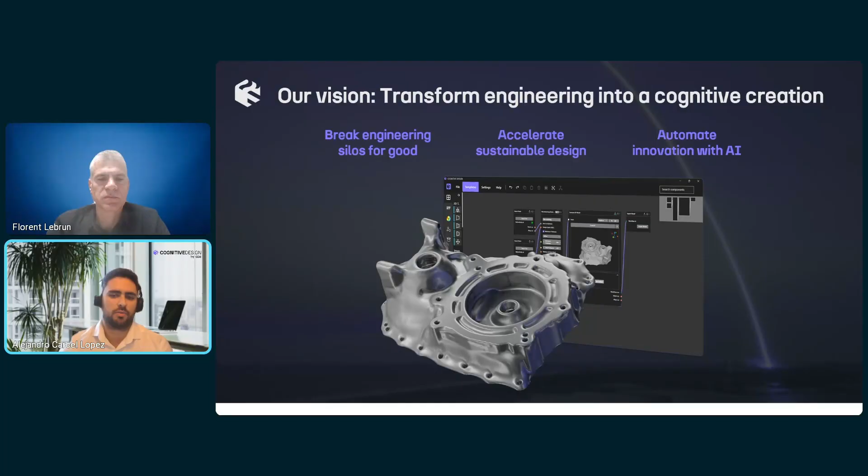Sustainability is an important topic for us as well. That's why we want to help accelerate sustainable design and have sustainability metrics in the design process. And we incorporate AI where it makes sense to accelerate the design process and the design decision-making process. So lots of automations in our software are powered with AI with the right purpose.

To give you better insight into our technology, one differentiating factor is we master implicit modeling. In our software, all of the modifications are done with this geometry kernel, which is different from traditional kernels like B-rep. We describe the geometry with implicit functions, which is a way to modify the geometry based on data in a very robust way without breaking it. This also allows us to work with highly complex, highly organic geometry without running into issues when doing iterations or automations.

We use AI-driven analytics to help engineers make the best decisions in their design process. For example, if you're trying different lightweighting methods for performance, if you're analyzing the implications in cost and manufacturability of your design decisions, the materials that you choose, depending on your business case, the cadence of production, or other data based on your context, your location, for example.

You can analyze all of that, and with AI, we can accelerate finding the right combination of parameters to find the part that corresponds best to the objectives you're looking for. It may be reducing cost, increasing performance, reducing weight, increasing manufacturability, etc.

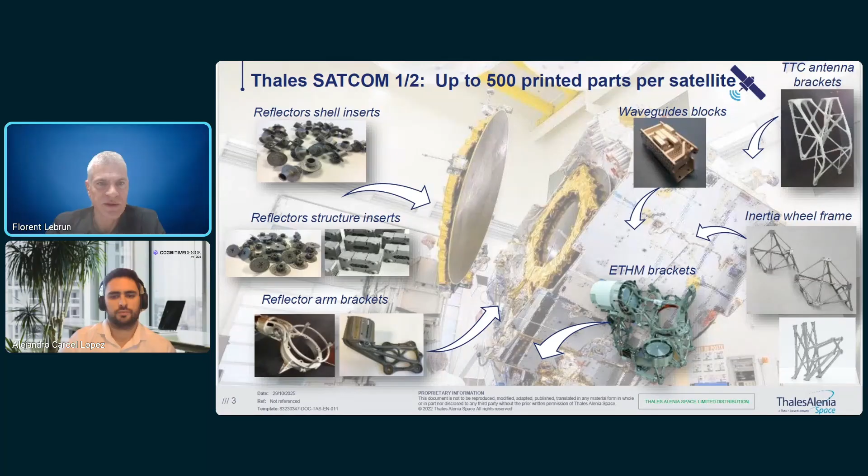With the next slide, I'm converging on the topic we will discuss today. For the satellites that TAS designs, manufactures, and tests, we use additive manufacturing to produce a growing number of technical parts. And these components, mainly printed in titanium and aluminum using powder bed technology, include structural parts as illustrated on this picture and RF components on the next slide. And sometimes we combine both functions.

The main reason for using additive manufacturing for this kind of component is obviously the mass saving and the improvement of the technical performance of the parts, or to reach a new range of performance offered by new design opportunities. And ideally, to obtain this without any additional cost in the design phase.

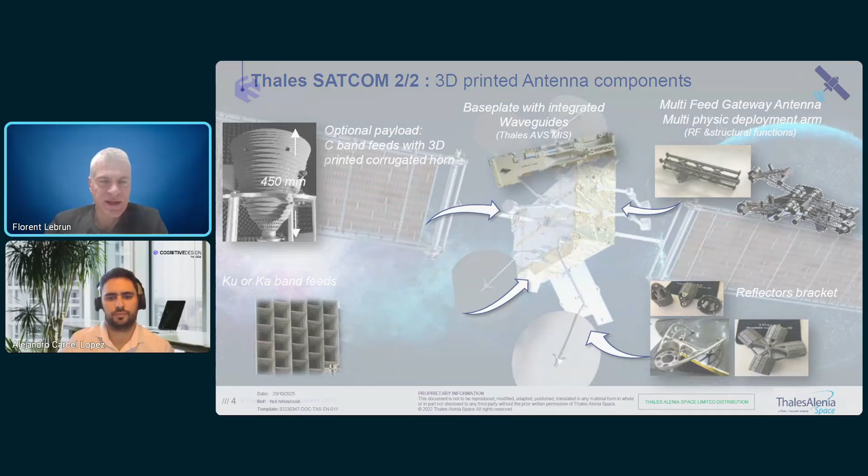On the next slide, I will introduce the study case we will discuss today. So the design activity of these 3D printed parts remains a critical step for us and for everybody, I imagine, with respect to technical performance, printability, and part cost. So we are therefore working to adapt our design tools to optimize this critical design phase. The main goal is to optimize the ratio of design cost versus final technical performance.

A few months ago, we were interested in the tools proposed by CDS, and so we proposed to CDS to work on the study case illustrated on this slide. So we are talking about little tripods, little fittings like this one, I hope you can see it, in titanium. It's not a complicated part. It's based on a design that is not really optimized for 3D printing nor in terms of mass and stiffness ratio. In fact, it's a legacy design we have never challenged. It does the job, but there is potential to optimize it in terms of mass, stiffness, and also printability.

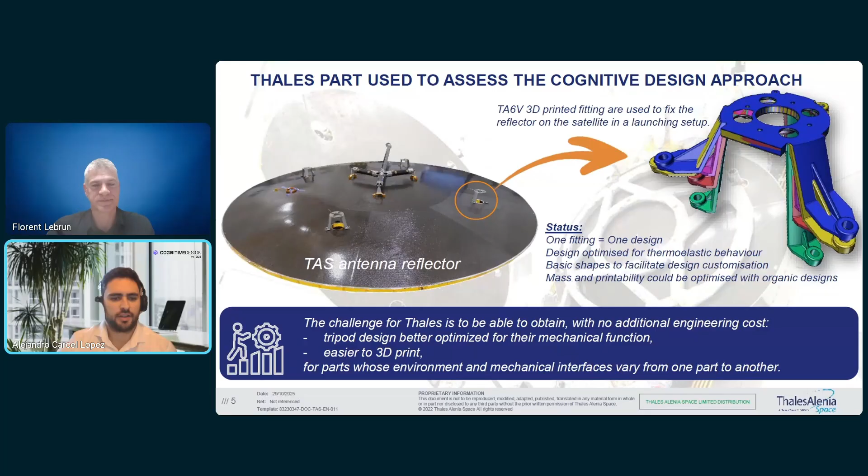Thank you, Florent. Very clear presentation of the use case. And just to kind of summarize it on our side, right? So the estimation is that there's about 80 variants needed per year. And as Florent mentioned, there's going to be quite some time going into each variant, and that leaves little time for innovation or optimization of each one of the variants.

The current design methodology for the tripod family, basically every time we have a new part, we have requirements, we have to do the CAD, we have to do the simulation, the manufacturability, the business feasibility for each one of the different components. And then every time we change the design based on the new requirements, we need to start all over again. So just by the length of this process, this means that we never have the chance to really innovate or make an optimization.

So this is where we came in with the objective of building one reusable workflow that allows Thales Alenia Space engineers to make decisions for each part on what is the best technology. It could be additive manufacturing, or perhaps even considering CNC machining in a more optimized manner could make sense. Aluminium versus titanium. Maybe titanium is not always necessary, and aluminium can be more interesting. So this cost, performance, and manufacturing trade-off is something that we're looking to tackle.

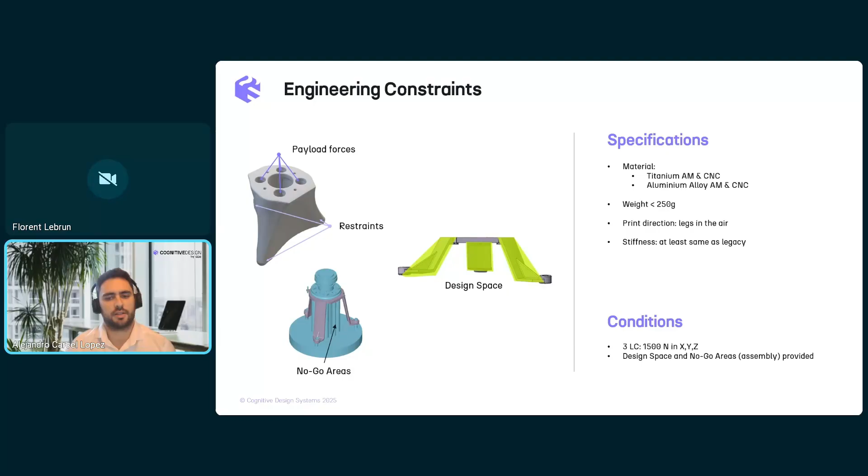Okay, so now that we understand the use case brought to CDS by Thales Alenia Space, we're going to dive a bit deeper into the cognitive design approach. So as we just saw, today is a linear process for every part, where every time we start from the requirements and we end up with the final part. And the estimation is that every time we do this exercise with a legacy workflow, this takes about 2 weeks. So 2 weeks every single time, and we end up with a part that is not fully optimized.

The way we rethought this workflow with cognitive design is we're going to build one single reusable workflow that can be used for each set of requirements. Every time we'll have the option to do a full-on design exploration for each one of these sets of requirements, and then design fine-tuning based on simulation, based on manufacturing data, cost data. And then we will be able to export the geometry for validation. So this allows us to reduce the process time for every part.

Part number one, you can see that it takes also 2 weeks, is the time to set up the engineering workflow, the design exploration process, and make sure that all the sophistication we need in the workflow is included in there, and that everything is working correctly. But then once we have this reusable workflow, every other part will only be a couple of days that we will need to take it from the requirements until the validation.

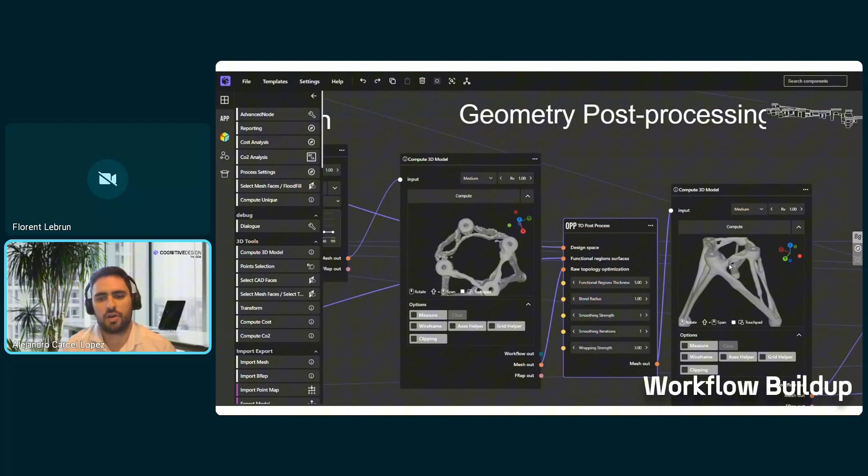Level set allows for automated smoothing, but sometimes for very fine topology optimizations, we might not use smoothing. And in those cases, we can automatically reconstruct the topology optimization by joining it with the functional regions and by smoothing all of the raw areas of the topology optimization result, and also making sure that all of it stays connected together.

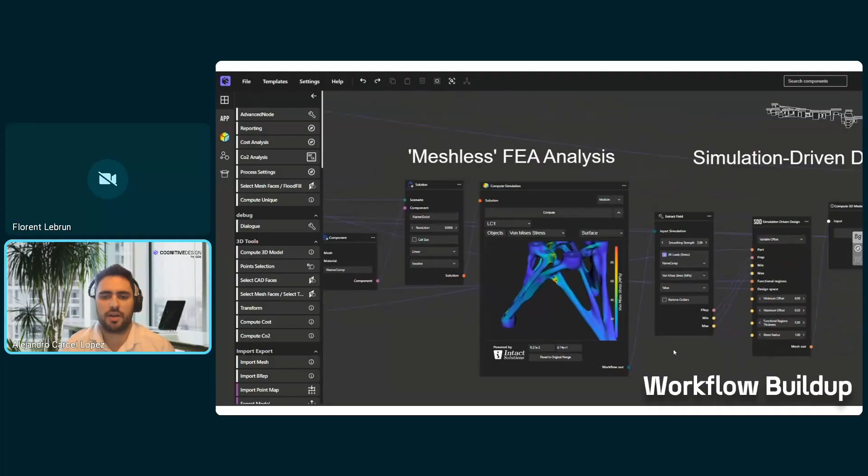Then we can quickly run a meshless FEA analysis. So we don't need to be creating a tetrahedral mesh every time. It's a fully automated process where every time we can get a performance metric on the design. So here we can see for the three different load cases, what are the stress areas and what are the stress values. So the next step is going to refine the topology optimization based on this data.

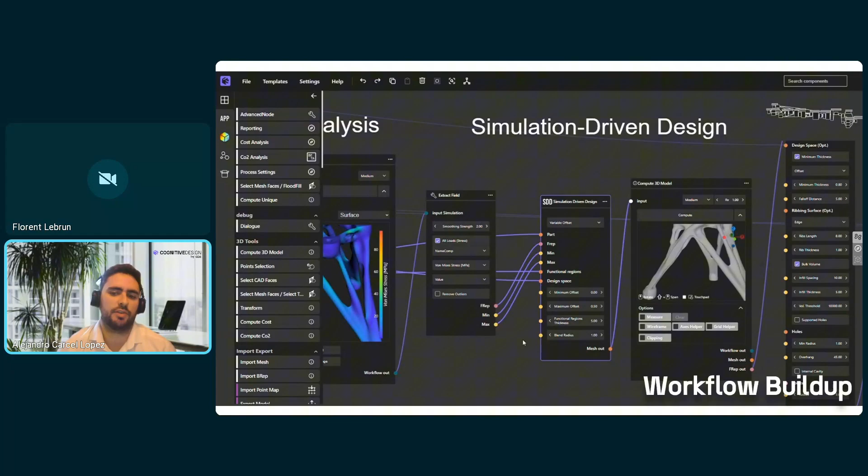We're going to use simulation-driven design. We have different options for simulation-driven design. In this case, we're interested in increasing wall thickness in the high stress areas to reduce stress levels, but by adding very little weight to the topology optimization. You can see here how that area with higher stress was solidified and thickened further.

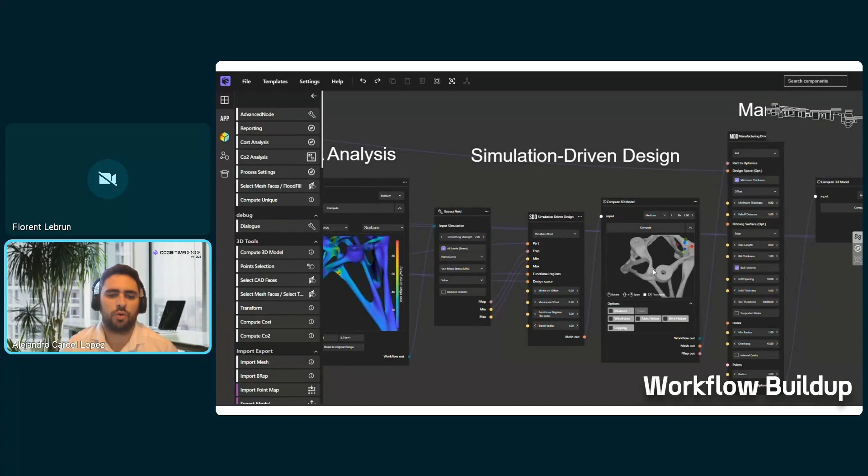And then we will take our geometry to the manufacturing-driven design. In this specific case, we guarantee that the minimum thickness for the process is met, 0.8 millimeters. And also we're making sure that we have no issues with bulk volume, so that we don't have thermal concentration.

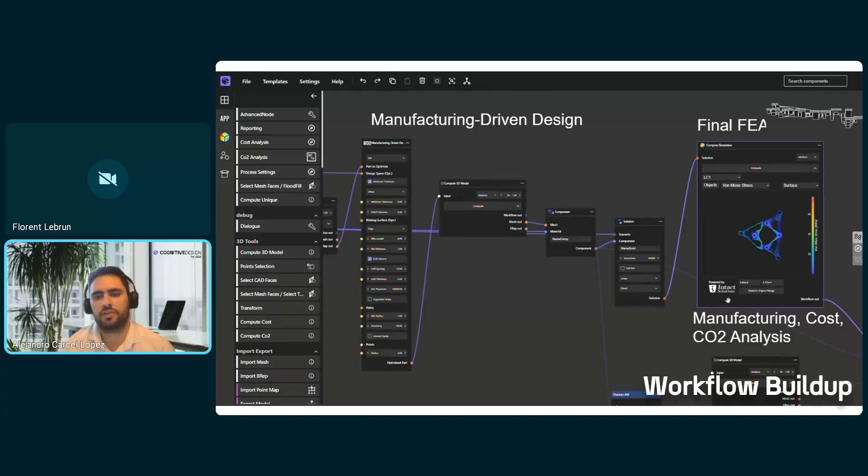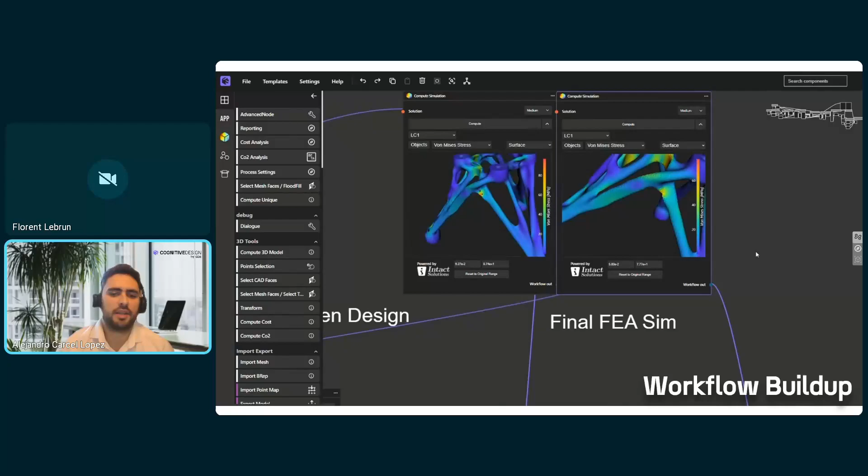So once our part has been optimized with a generative design method like topology optimization, with simulation-driven design, with manufacturing-driven design, and our geometry is clean and smooth and integrated with everything, we do the final FEA analysis. So in this specific case, when we compare before simulation-driven design and after simulation-driven design, we see that our maximum stress value has gone from 97.4 megapascal to 76 megapascal.

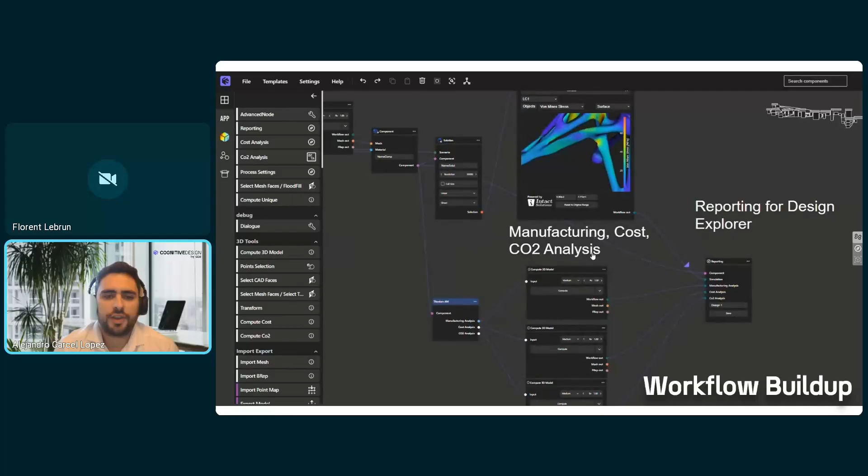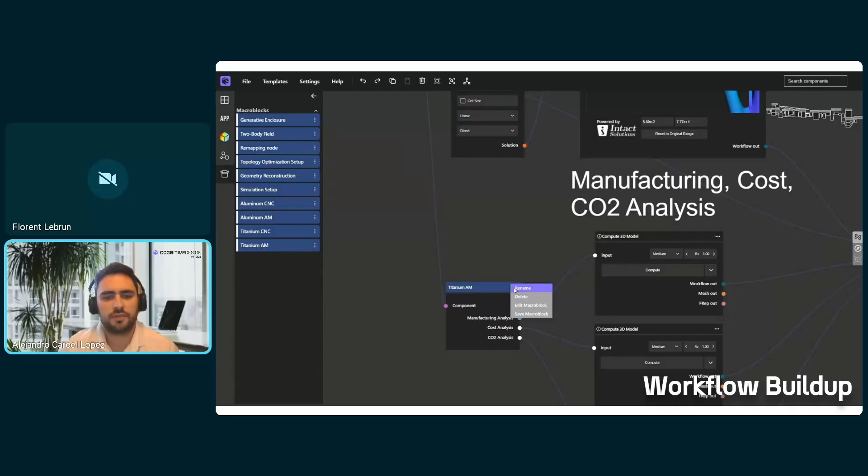So now we can look at other things like the manufacturability, the cost, and the CO2 emissions. So we have different macro blocks that we can create and store in our library to reuse each time. You see that we have aluminum CNC, aluminum additive manufacturing, titanium, also for both of them. So each one of these blocks has fully customizable parameters when it comes to the manufacturing analysis, to the cost

analysis, the CO2 analysis. So for manufacturing analysis, we can adjust the minimum thickness in the process, the overhang angle, the volume threshold, and also things like slice area variation. And it will also analyze other issues such as internal cavities.

For the cost, we will have access to what manufacturing technology, quantity of parts, hourly rate of the machine, machine cost, and recurring and non-recurring costs. For the CO2 analysis, you will have access to machine power consumption, material-specific energy emissions. So you can fine-tune all of your parameters.

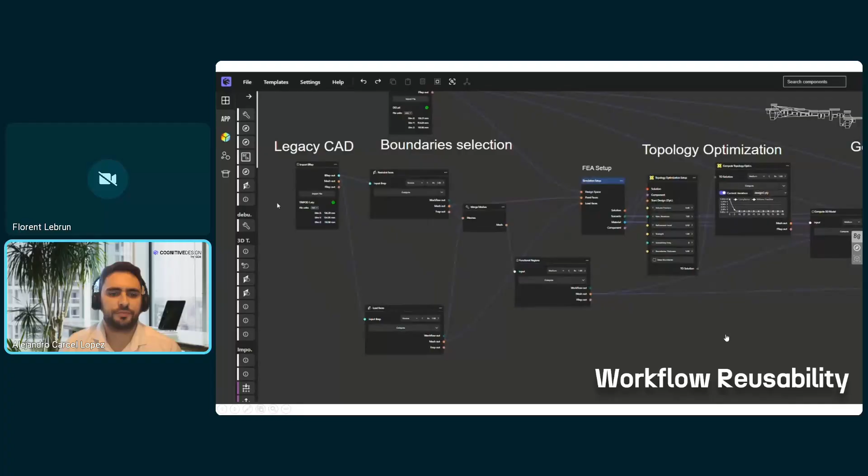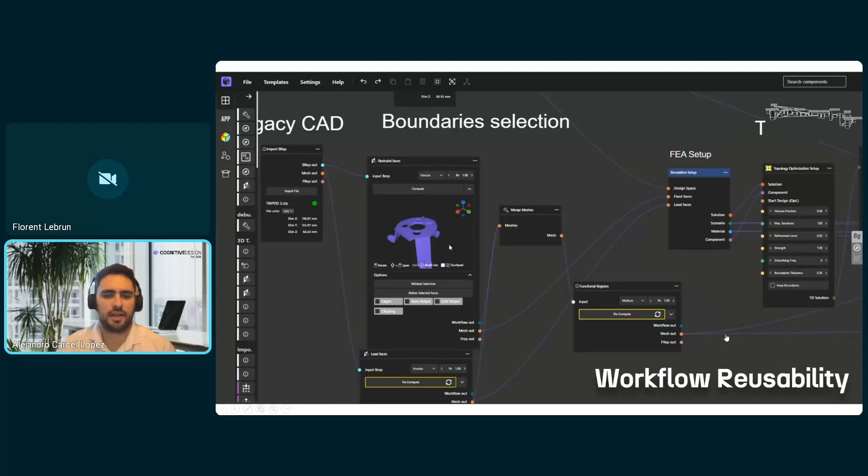And now I can come to the very beginning and insert a new geometry. You can see that we're changing the tripod file. We're changing the design space. And then we can reuse the whole workflow again. So we can either manually select faces like we're going to do in this example, or you could also import them if you have them available from CAD. Either way could be done. So we are selecting here the faces that are going to be restrained.

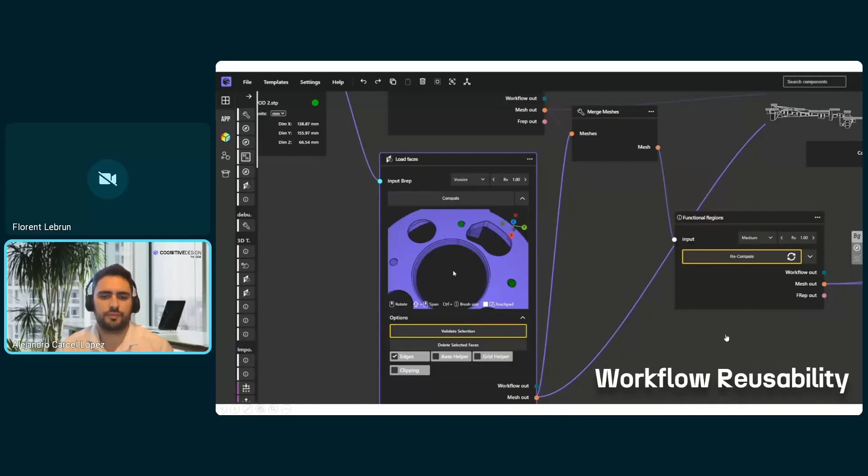And then we're going to select the faces that are going to be loaded for this new tripod. Then once you're done, you can validate your selection, and then you can start rerunning the workflow. You can either run it at the end and everything will be recomputed automatically, or you can go one by one. For example, in this case, I'm also changing the load case in the part. So I'm reducing it from 1500 newtons to 1000 newtons for this smaller bracket.

And then you can run the topology optimization again. And you could as well explore different parameters if you'd like. So we launch it, and then the optimization process will start. So you can see here the optimization process. We accelerate the video a little bit for time purposes. You can see that we have obtained the new geometry that is considered optimized for this load case.

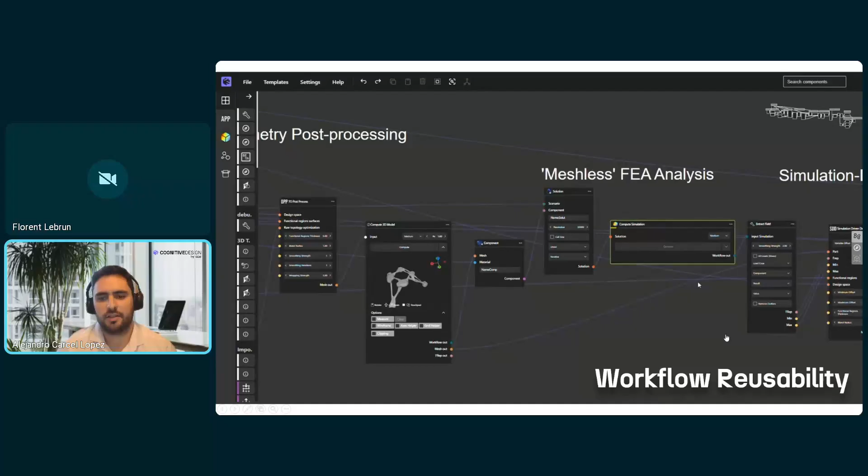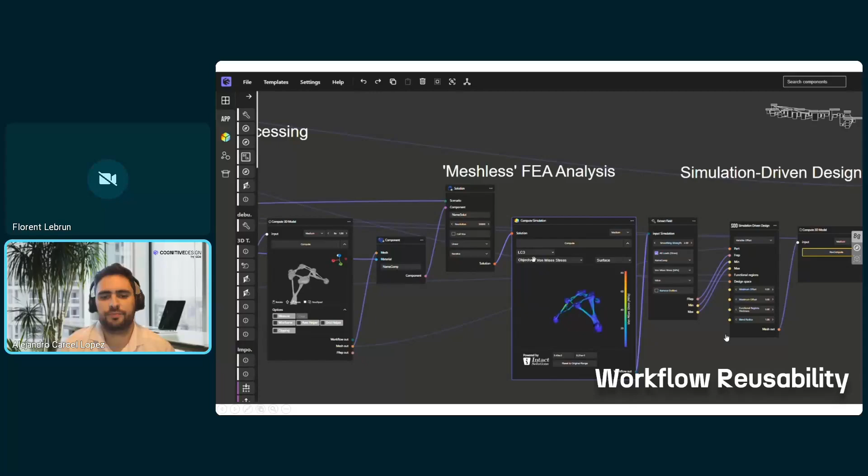And then we will do a first analysis on this topology optimization in order to obtain data on stiffness and also on stress values. You can see the von Mises stress map there. That was load case number 3. This is load case number 1. You see that we reach about 120 megapascal.

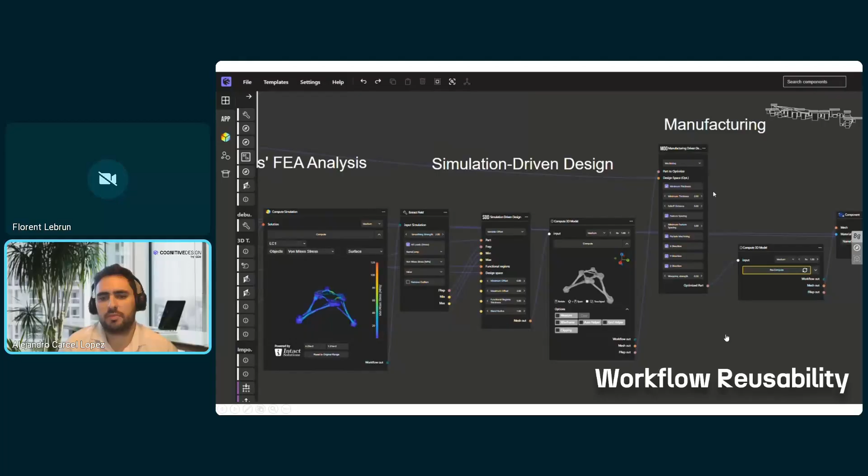So now we are going to plug the part into simulation-driven design. So we're going to, again, use the variable offset strategy. And then we will observe that the thicknesses have been modified based on the stress data. And then in manufacturing-driven design, in this case, why not? We can do a modification. Maybe we're considering machining, so we change from additive manufacturing to machining. And we're going to guarantee a certain minimum feature spacing and create a part that is manufacturable by machining.

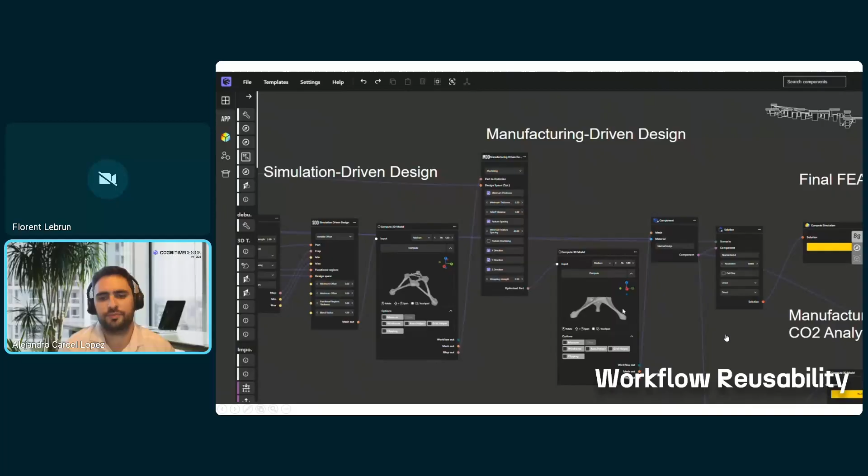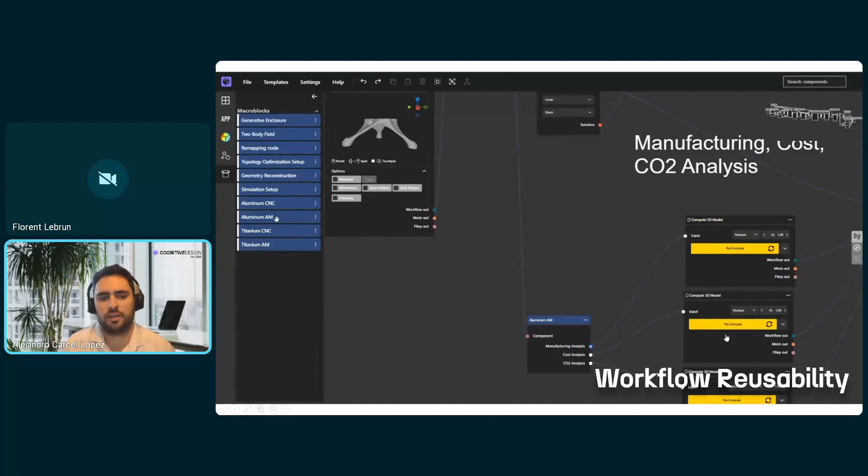So you can see that we automatically created a geometry that is a lot more machining friendly than the pure topology optimization, which is a very complex organic shape. And then we can go ahead and run the final FEA analysis, and then we will take care of the manufacturing, the cost, and the CO2 analysis. Since we have changed the manufacturing method, instead of using the aluminum additive manufacturing library, we will use the aluminum CNC library.

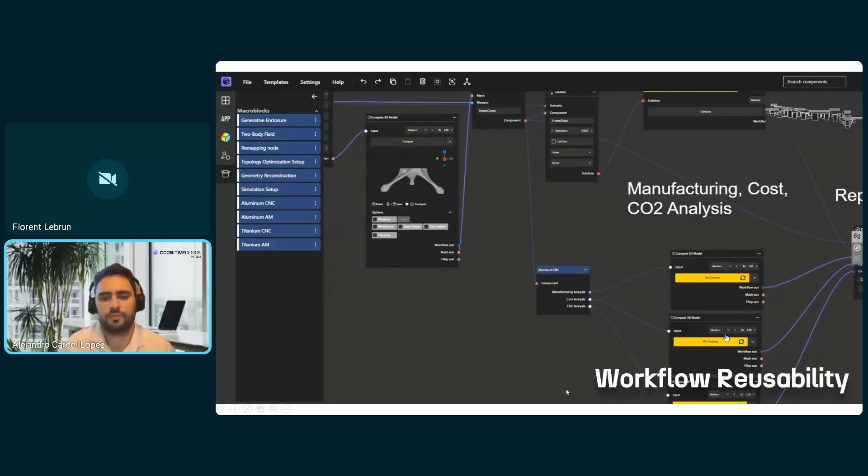So we have our final FEA analysis done on the geometry. We have highly reduced the stress levels. You can see that we are at about 41 megapascal for load case 1, whereas at the beginning we were at 120. And then we do the final manufacturing analysis, which we can see here, and we can see the areas where we have higher risk based on the thickness, for example.

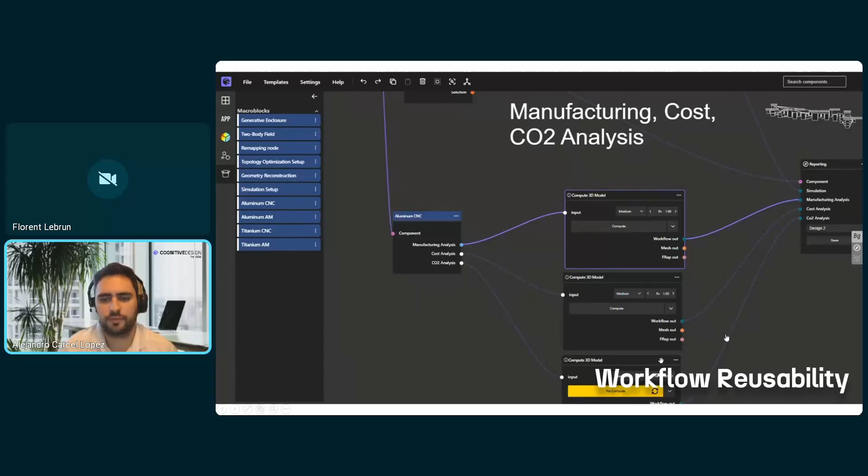You can calculate the cost and the CO2 analysis, and then you can create a new Design Explorer iteration. You save it, open the Design Explorer, and there's our design. So in this process, we manually added it to the Design Explorer, but in a very recent version coming up, we will have the ability to add all of the designs automatically as well.

All of these designs are much stiffer than the original tripod, and all of them, except for design number 5, are quite lighter compared to the original design. And all of them have a safety factor above 1, even when we use very conservative hypotheses for the aluminum material in additive manufacturing, where we consider the yield strength to be only 70 megapascals.